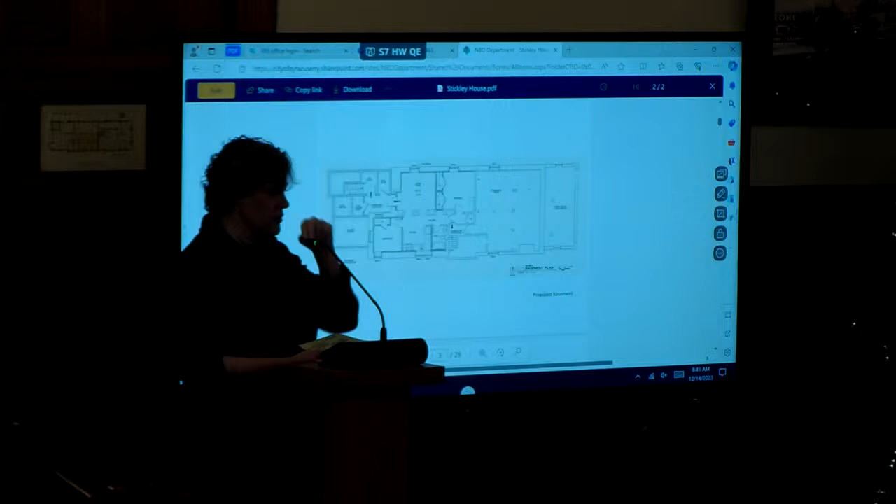All the kitchens were removed in phase one. All the bathroom fixtures, except for the historic bathroom fixtures, were also removed.

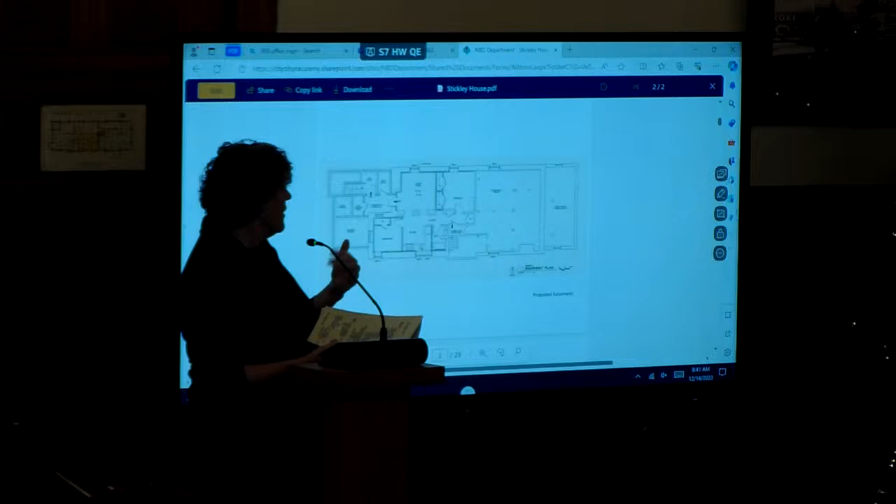Here is the proposed basement plan. There has been an apartment in the basement since the 1940s. We are proposing to maintain and completely rehabilitate that apartment. There is no historic material left from the 1940s apartment, as it postdates the period of significance.

The period of significance of the house is from Gus's renovation in 1902 until he sells it in 1911. The existence of an apartment dates to the 1940s. It was completely renovated in about 1985, when all new framing, bathroom, and kitchen were put in.

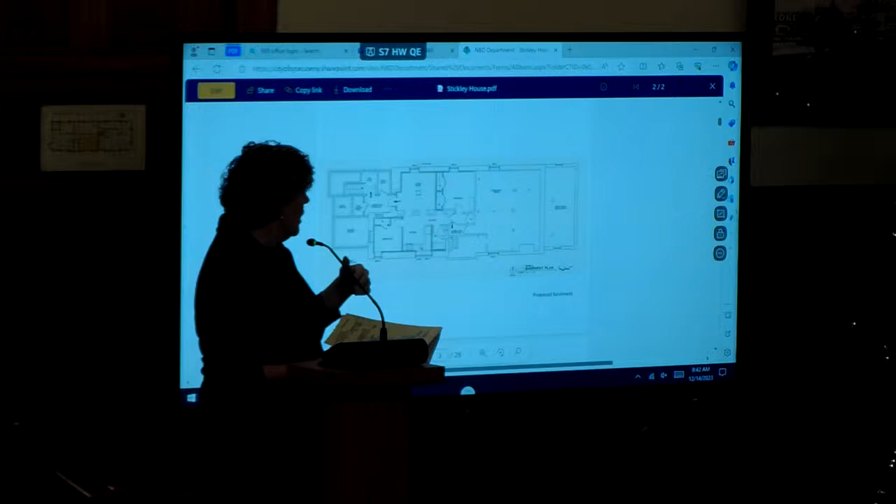Basically, the floor plan of the new apartment is the same. You can just see a few new walls here. I'll point out that this is the proposed addition, and I'll talk about that more on the first floor. This is basically the foundation of the addition. The remaining part of the basement is mechanical space in the front part of the house.

So it's essentially a small two-bedroom apartment for a caretaker. On the first floor of the house, from here up is the existing house with the new porch, which dates to 2017-2018.

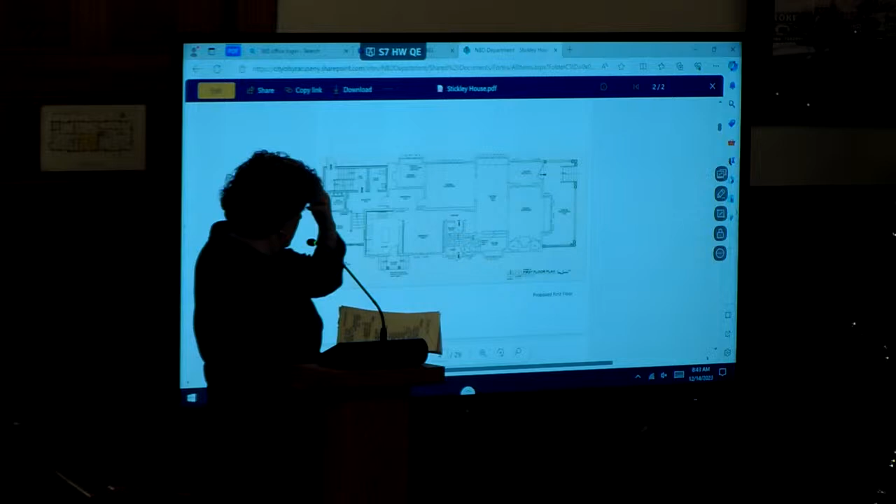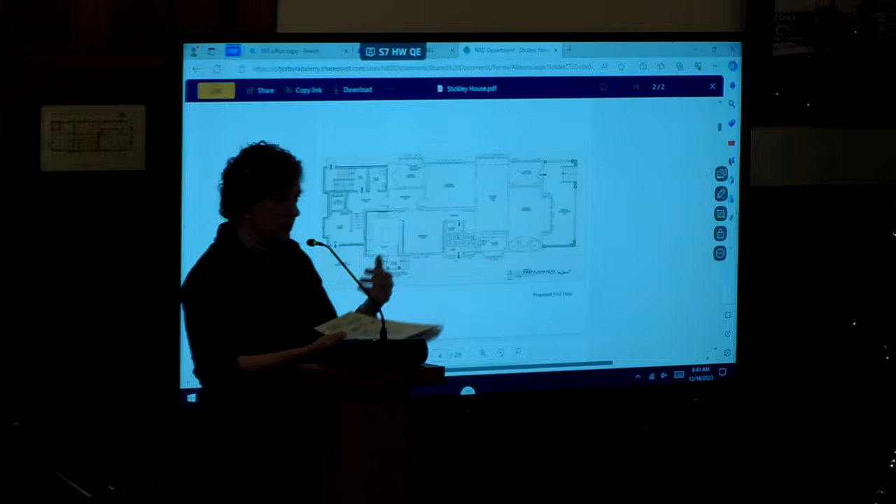The first floor will be restored and used as a community space and museum. The Onondaga Historical Association will be managing the space, and it will be available for those staying upstairs, as well as for rental space or community lectures—for example, if the Preservation Association or an organization like UNPA wants to have a meeting there.

In the back of the house is the proposed addition. This is a 460 square foot, very small addition which provides the accessibility that we need for the house. We're calling this the garden entry, with the entrance on the south side of the house at the southwestern corner, coming into an at-grade lobby, as described in the package.

There would be a small LULA, which is a small elevator, to get you from grade to the first floor and then up to the second and third floor, plus a set of stairs up to the same level as the first floor. There's also a secondary fire stair added here, and a small handicapped bathroom.

The only other new addition on this floor is this kitchen stoop, which replicates the historic kitchen stoop. That was actually approved by the LPB back in 2016.

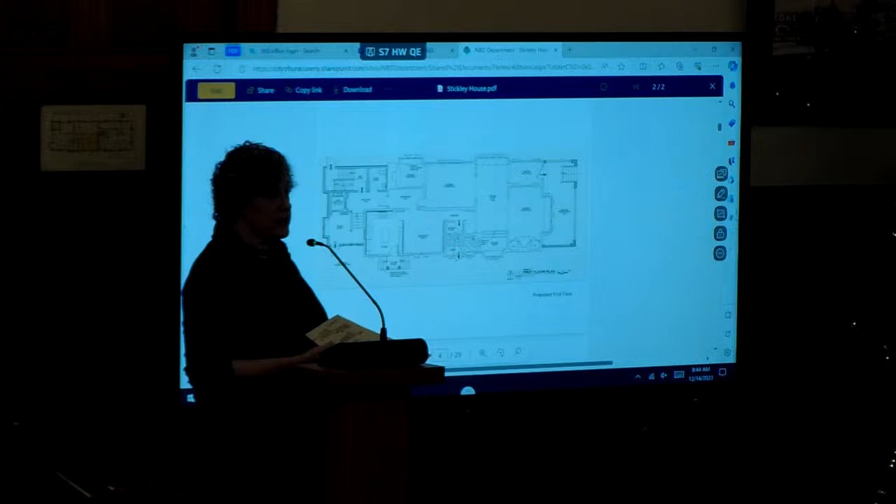On the second floor, we have added a few new partitions, keeping them to a very minimal amount, trying to preserve as much of the Gustav Stickley historic floor plan. The most significant rooms I'll describe are the primary bedroom here, which would have been Gustav Stickley's bedroom, and his adjacent office—we'll be reopening the door that used to connect those two rooms.

The bathroom here was added by the Wiles family, probably in the late 1920s or 1930s. And then this area here is the stair hall.

Some of you may have been here for the board meeting back in April when we came before the board for a removals project this year. We were able to open up the floor here; this had been covered over in the 1940s for a kitchen. We've opened that up, and that stair will be restored. You can actually go to the house now and walk up the stair, which is really fun.

That stair had been covered over since probably about 1947 or so. This is the historic bathroom that still retains its clawfoot tub and its original 1900 sink.

This is sitting room, bedroom, bathroom for suite number 3. And then sitting room, bedroom, and bathroom for suite 1.

At the back of the second floor, we have retained half of the sleeping porch. The sleeping porch was built in two different parts. It postdates the period of significance—we believe it's probably from the teens, and then maybe late 1920s. We're preserving half of it for the sitting room for this suite.

We've also stepped back the addition, so it's even smaller on the second floor. We just have the LULA, the stair, and then a small housekeeping room for linens and things like that.

This is the area where we are proposing to do window replacement. I have a couple of slides on that later, but this is the location here. And the other 4 windows, which are 1996 replacements, are in this bay here.

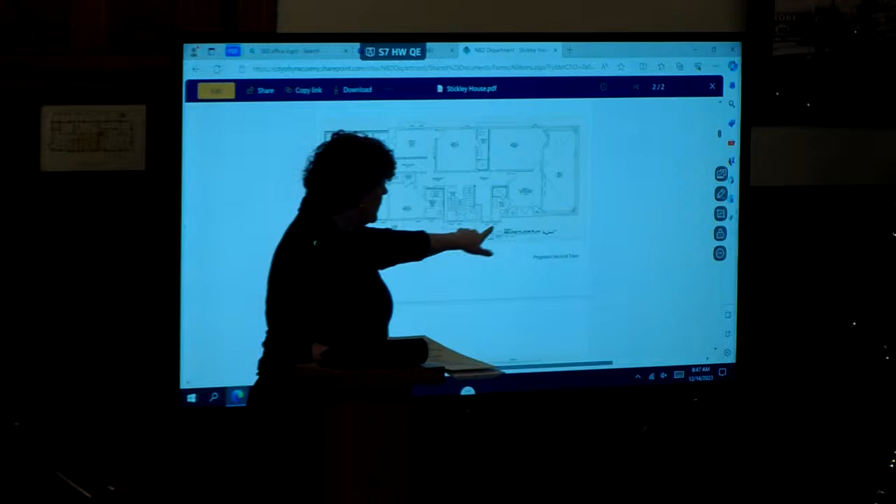This is the second floor of those 2 windows. This is the first floor of those 2 windows, just so that when I get to that point, you know where they are.

This is the 3rd floor. The 3rd floor did not have any significant craftsman period renovations, so it mostly dates to that 1900 period of the house. It has been significantly renovated over the years.

During our removals project this year, we uncovered locations of closets and things like that. It is certainly a secondary space in the significance of the house, but Gustav spent his later part of his life here—this was his bedroom. So we need to be respectful of the 3rd floor as well. That would have been his bedroom from 1920 to 1942 or so.

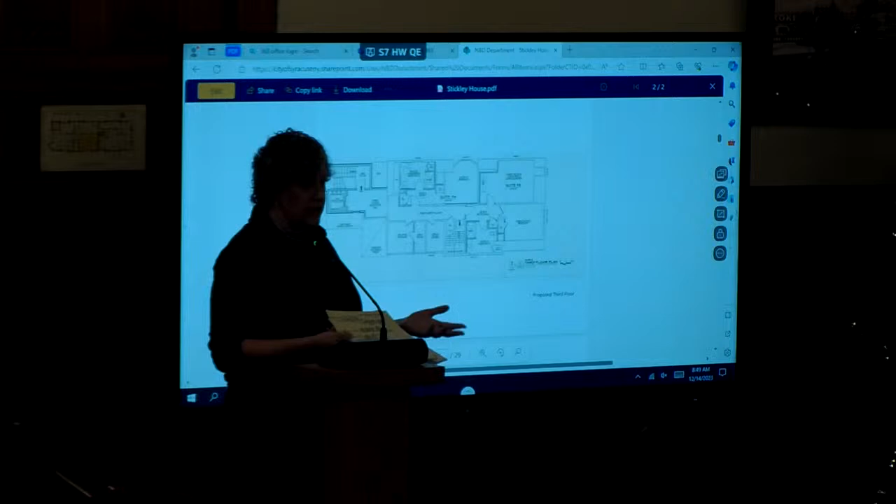There are 2 suites on the 3rd floor. The front suite is here, and bathroom here, public hallway. This is a low headroom storage area. This is a former bathroom with beadboard that we won't be restoring as a bathroom—we'll restore the room, and it will be a flex space for OHA, either a small office or storage. And then the secondary suite on this floor is here, suite 4.

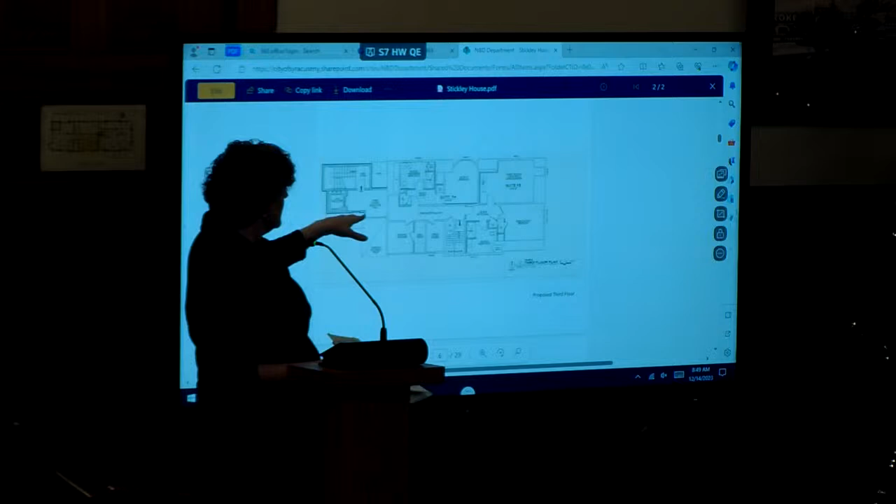And then the addition, about the same footprint as the second floor, except this roof area right here is a small indentation. It keeps us away from the historic chimney here, and it also provides a place to hide the kitchen vent, so it's away from any public view.

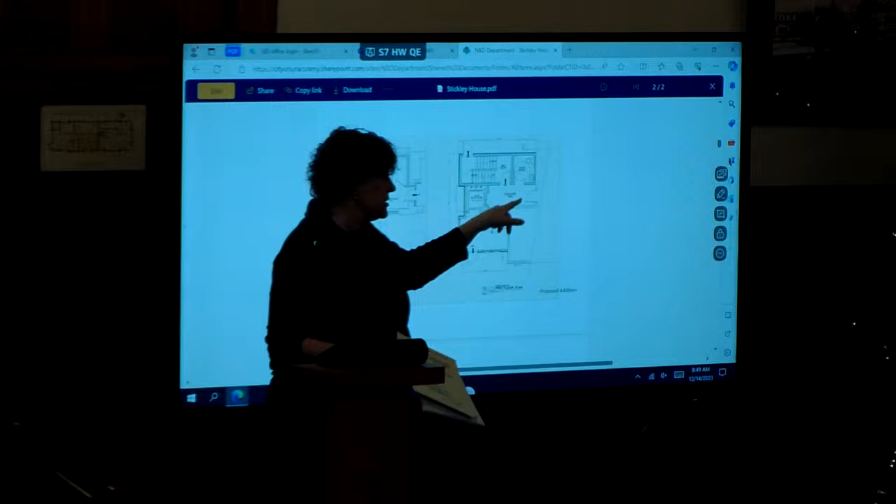This is a blow-up of the proposed addition. Again, garden entry, first floor, LULA, hallway. And this connection here, which I didn't talk about before, is through an existing window into what used to be a pantry. The pantry was pulled out a long time ago.

It was converted to a kitchen at least before 1985. The 1985 plastic laminate kitchen was pulled out about 6 years ago. And that's where we are proposing to connect to the historic house.

This is the foundation plan for the basement, where we'll have a secondary egress from the apartment on the basement plan, a small mechanical room, and then all of this is kind of crawl space. And then this is the stair up and out to grade at the back of the house.

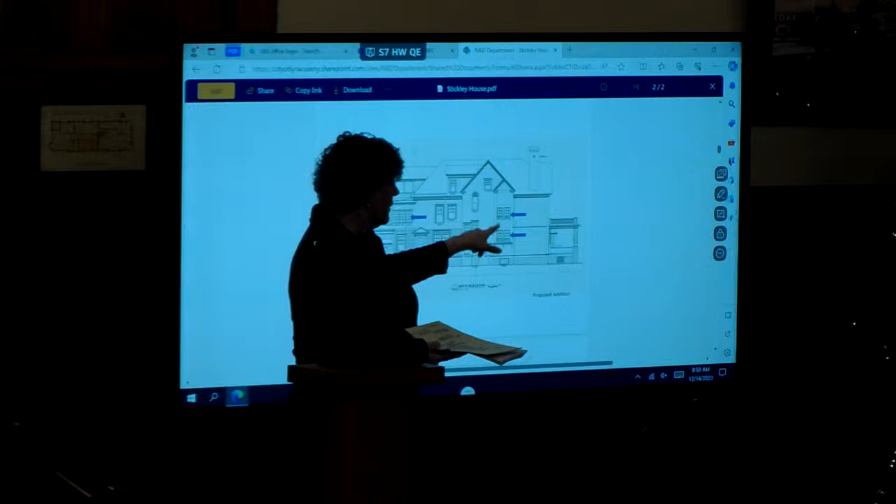This is the south elevation, standing in the driveway, looking at the house. These are the 4 windows that we were talking about replacing to match the leaded clear glass windows as we did in phase 1. Those were severely deteriorated in the mid-1990s and were replaced.

Right now they have a wood muntin, which is not historically appropriate. They would have been the leaded glass windows like we have in the living room and dining room.

This is the south elevation of the sleeping porch, and this is where we are proposing Marvin replacement, wood sash. If you think about most sleeping porches in Syracuse, they either have screens or lightweight windows, and these are very lightweight windows.

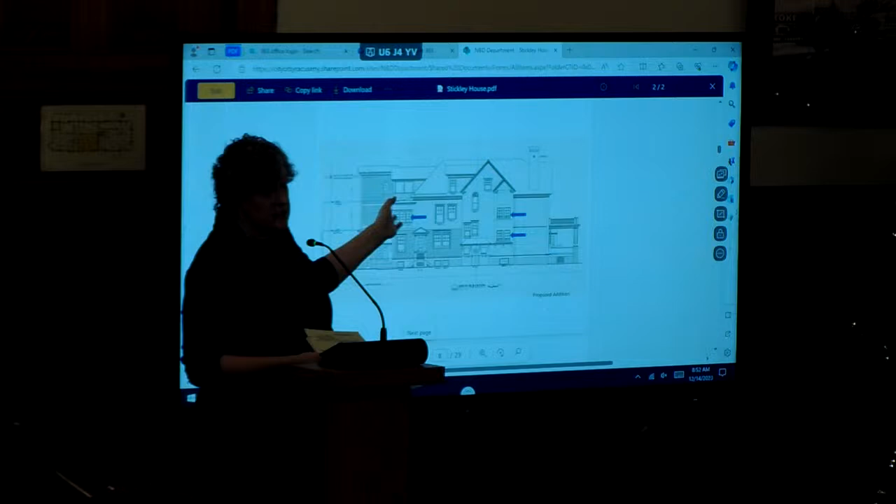They're not weather stripped. The preliminary determination from the State Historic Preservation Office, which we got probably 2 years ago, was a verbal yes, they will allow replacement of these secondary windows. They're not of the period of significance of the house, and we want this to be a finished space as part of this back bedroom.

And then this is the proposed south elevation. This is the lower part that is closest to the driveway, and then this is further stepped back in that blow-up of the addition that I showed. And then we're emulating the wood casement windows here from the screen porch.

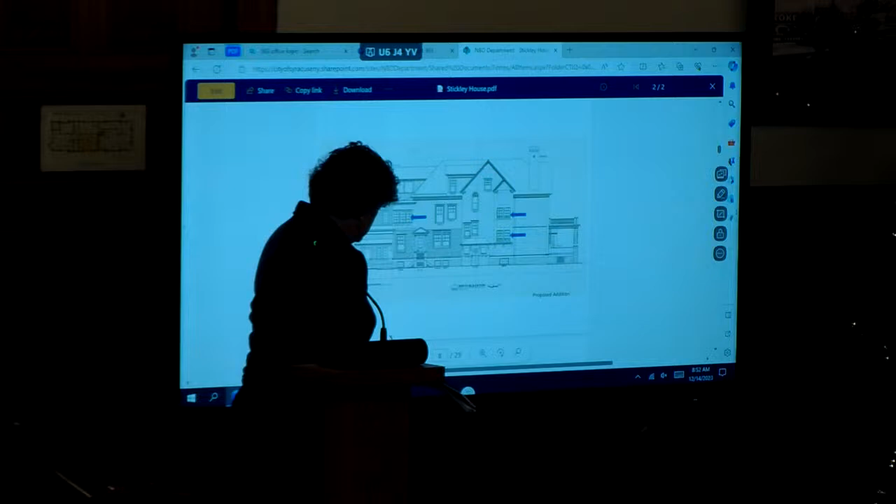The addition is stepped back from this corner and then stepped back from the other corner. You really will not see the addition from the street. You'd have to go up the hill and crane your neck to see the addition at all.

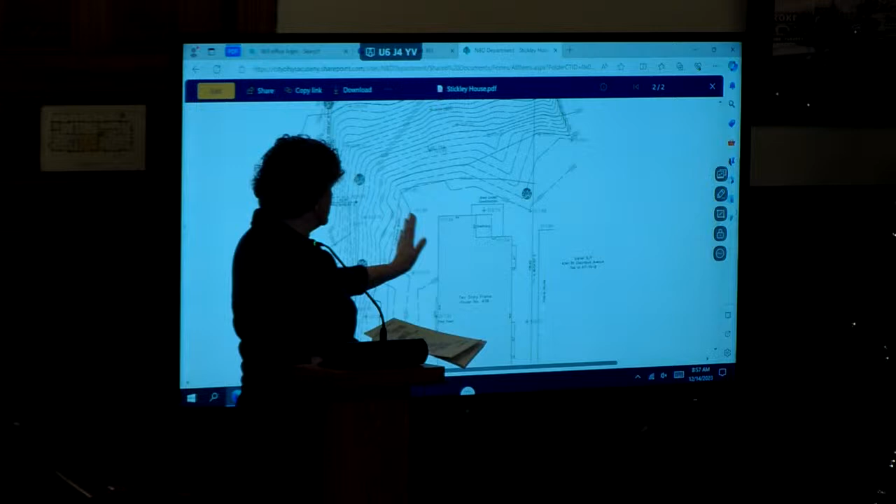So these are slides from EDR. This is the topo that we had done recently, and it is basically informational. What you will note is that directly to the west of the house is a large hill, and to the south of the house we have a smaller hill that goes up to the neighbor's driveway.

We've met with the neighbor to the south and discussed his driveway and how water should pitch from his driveway.

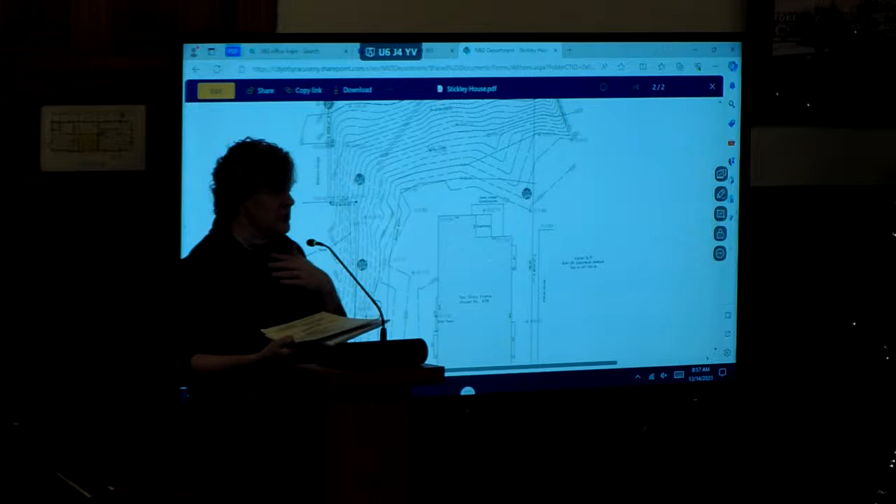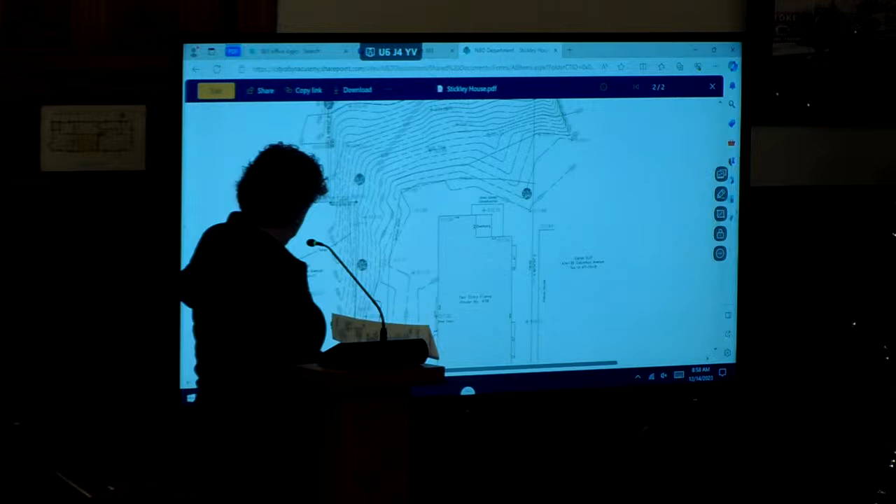So what we are presenting today is basically what I'm calling the concrete backer wall, which we will need to do as part of our phase 2, so that we can pour the concrete backer wall when we do the foundations to the addition. And then EDR will be coming back with the final site design development for your review at a separate time. So let's see if I can...

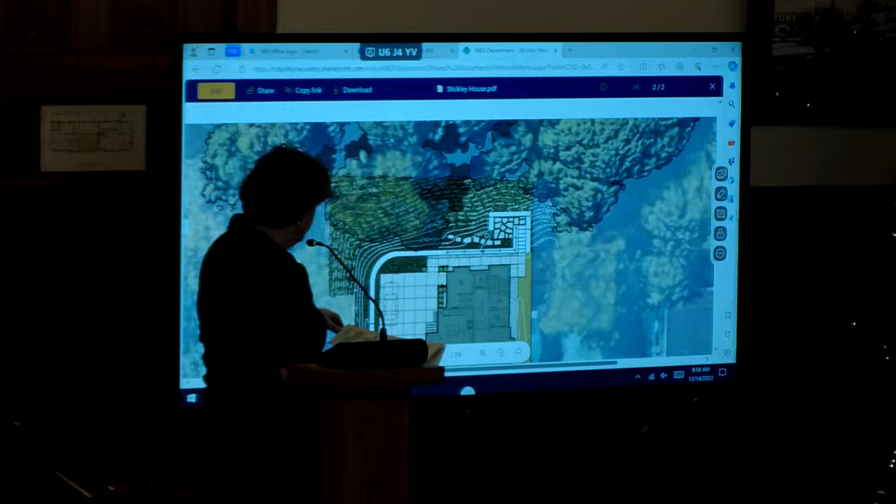This is just an overlay from an aerial photo. So this is the preliminary design that EDR has presented to the Gustav Stickley House Foundation. The parking layout was actually approved by the planning board a number of years ago - I don't have the exact date, but Dave, do you remember? It goes back like 3 or 4 years.

So the area in white here is the retaining wall. There is a detail in your packet, I think the last slide, of the proposed retaining wall, which would eventually be stone-faced with a stone capstone. But for this phase, it will be a concrete wall so that we can get that in, and then have mobility in the site, because right now it kind of gradually slopes up to the hill in the backyard.

So item 13 is the wall here. So here's the addition here, entryway here, exit from the stair goes out to the north. The next door neighbor house comes back, and they have a small parking lot, probably for about 4 cars in the back.

And they also have, I'll say, a steep hill. It's not quite as steep. Also of note is that there's about 4 trees that need to be removed. They've been undermined with runoff and things like that. And I think there's like 2 here.

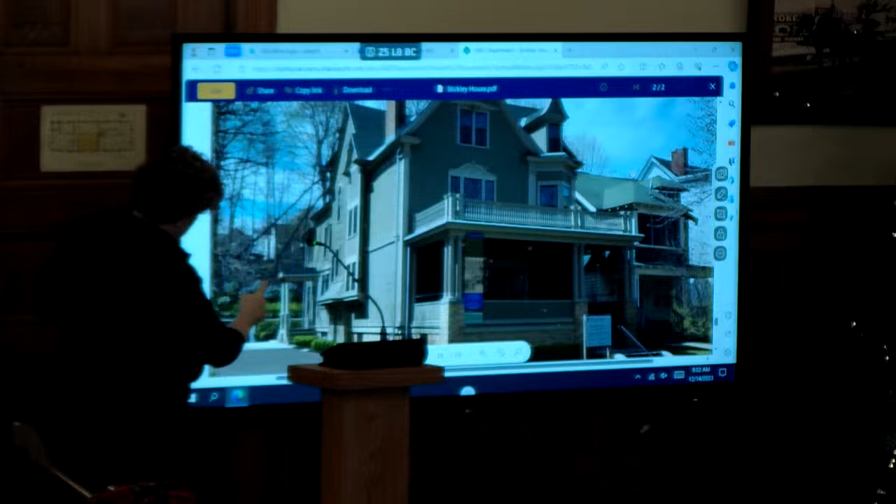And then this should be... it should be over there. Squeeze it up. Or just scoot it up. There you go. And you might be able to go to the side as well, push it over to the right. Put it over. Yeah, there you go. No, maybe that picture's not about it.

Blacktop, and again, these are presented as informational to the board, and you can see the top line here is the top of the stone wall, and they've illustrated stone here.

This is the kitchen stoop, and then blacktop, and then concrete pavers. Again, the front steps from the sidewalk to the porch, not the porch itself, are concrete. So it's all early 20th century. Concrete is appropriate for this period.

So EDR would present a planting plan and paving materials and all that other stuff. There you go.

So what would be built would be the drainage put in, the concrete backer wall, the footing, but not the stone and not the bluestone coping. And there's one small section that will require a guardrail, which is completely hidden from public view, by the back fire exit stair.

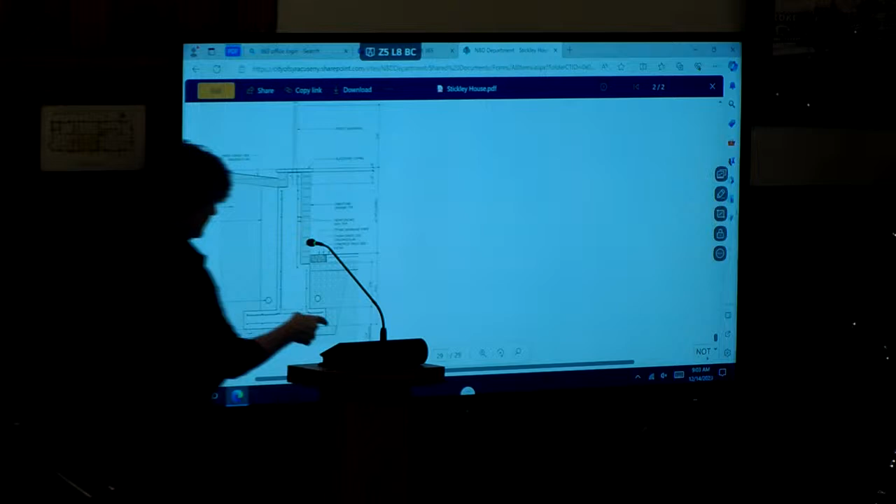And it's steps going up to the back garden. And EDR would propose the guardrail for that at a later period. That's it. That's all I got. Thank you.

Anyone who'd like to speak in favor?

What's that? I'll require this be moved. Can you state your name? I'm David... Michael. I live at 94 Xavier Circle. And as Beth indicated, I'm on the board of the Gustav Stickley House Foundation.

Beth is always very thorough. Just cover a couple of things. The foundation supporting the project is working to raise the funds. To date, we've received $2,250,000 of grants from state and federal sources. Particularly want to mention $250,000 from the county and $250,000 from the city, ARPA money. The foundation is in the process of raising additional money.

Our goal is to start the bidding process in early next year, hopefully January. However, the plans and bid documents do have to be approved by both the State SHPO office and the Federal National Park Service office, which could always be a delay. But we do hope to start the work in the spring.

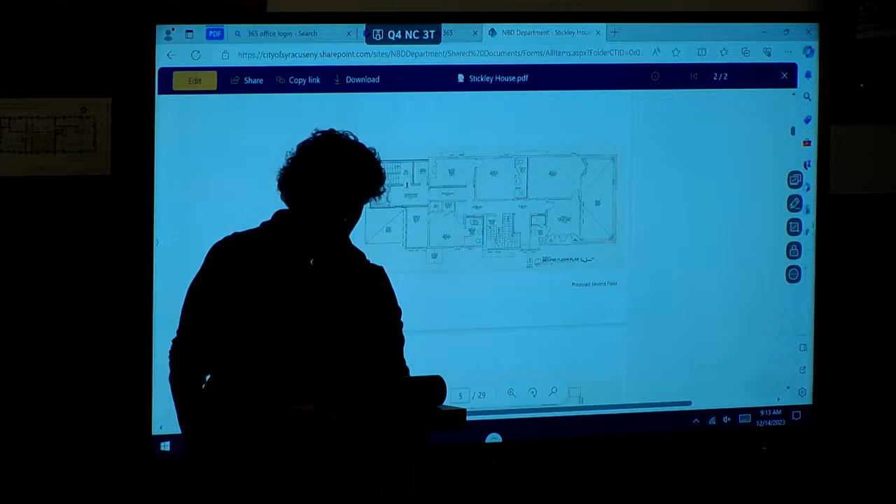You want to put the plan up? Yeah, that as well. So these three doors are kind of an iconic Gustav Stickley, they show up in the renderings from 1902 from the stair hall, which is a view from here looking this way. Right now, this is the entry door to this bedroom, entry door to this bedroom, and entry door into a small closet. What we've taken here for this small bathroom is we've taken three closets and combined them into one bathroom. So this door is fixed in place.

These two could be operable into the suites here, but what we tried to do was control noise from downstairs, because you'll have noise coming up this stair. We've closed these in place. We've done this in several properties, including the Babcock Shattuck House at the corner of Westcott and Genesee Street, where we closed off public hallway doors. We plated the doors at the hardware so the fire department doesn't think they can get accessible into that room.

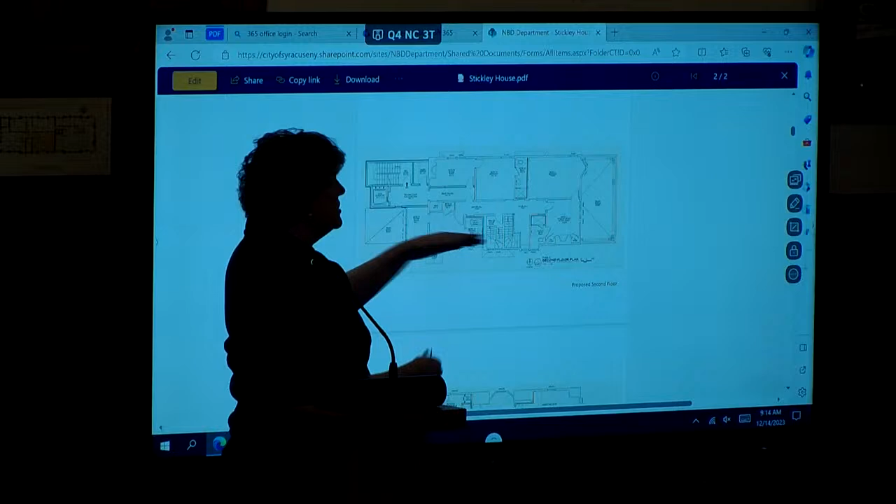What we did was create these secondary entries to keep noise down from this hallway, and that's why those three are shut in place. In this case, you'd come down the hall and enter here, then into this bedroom. You'd enter into the sitting room here. So that's why those three are closed off. They are historic doors, they have some issues and need restoration, but that's the plan for those three.

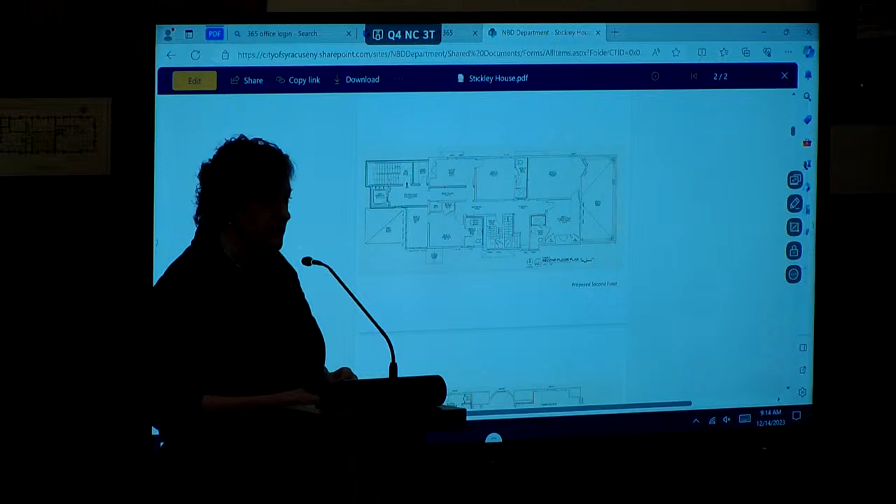That's what I had assumed, but thank you for clarifying. I had a question about the third floor, and I'm not sure if it even applies to this property at all, but is it required to have any additional means of egress?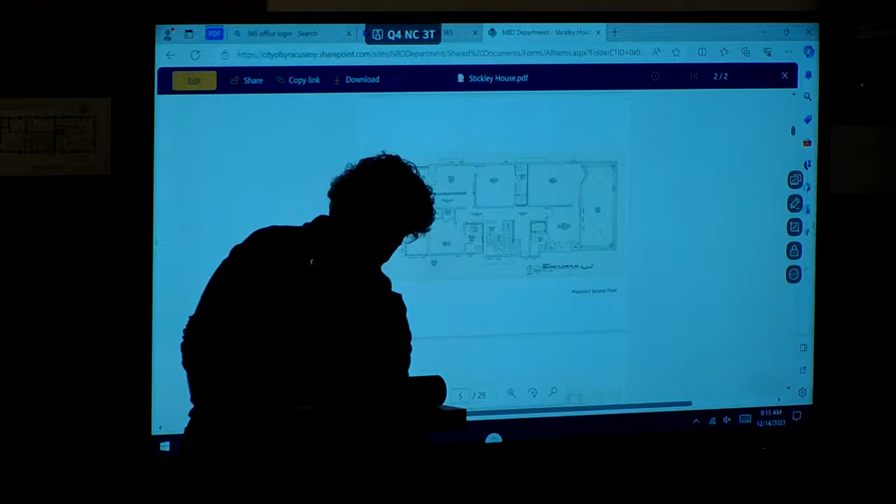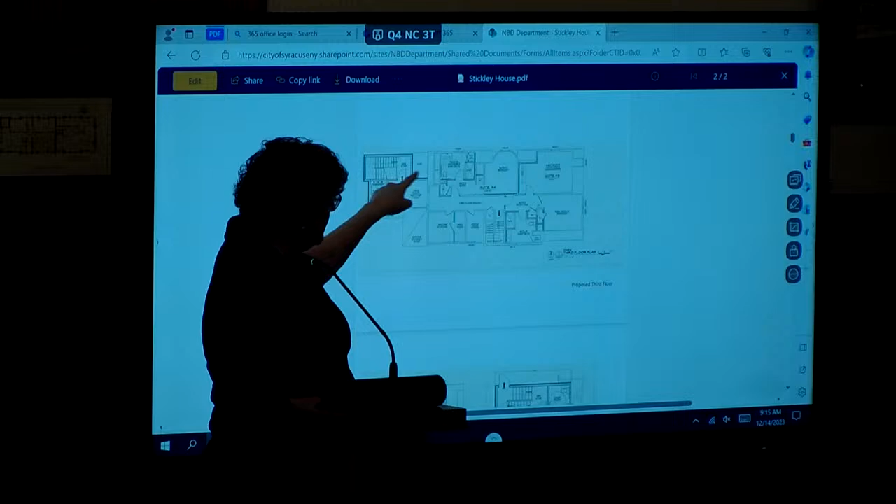So here's the stair at the second floor, and there's an up and a down here from the second floor. There is no formal fancy front stair going to the third floor, but we have this stair, which we just call the existing stair, but it would be the back stair, the service stair if you will, and then we have the secondary stair here. This is that little porch Jeff was talking about, an existing roof over the sleeping porch. So this is that little porch right there, and this is the little addition to get you to the third floor.

So yes, we have two stairs, and the house will be... I saw the two, I just was wondering if in the event there was a fire and they couldn't access those stairs at all, did you have to have something? That's why we have a window, and that's why we have this stair. And the building is sprinkled, correct?

What is it classified as, because it's no longer residential in a sense? So what are you classifying it as? Okay, so then R3? Okay. Well, that would also trigger the second exit, because if it was residential you could technically have one stair, using a window for exiting. I know, but it depends, if it was residential that's how they'd do it. Okay, any other comments?

Cynthia? No? Okay, so this is a certificate of appropriateness, so we need a motion. Would someone like to make a motion? I move that we approve. I second. All in favor? Aye. Any opposition? Motion passed, thank you very much. Good luck, keep up the great work, appreciate the presentation, very well done.

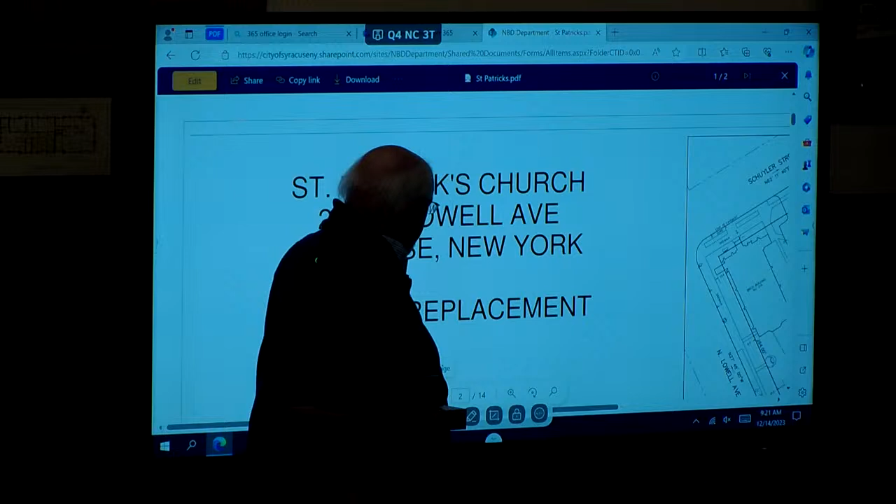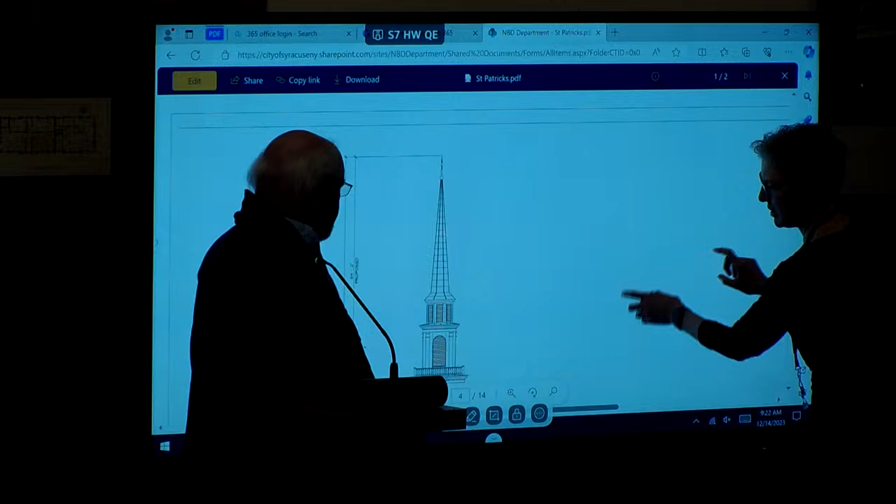Nope. Touch the screen. Right. Down. Zoom out. I have to admit, I didn't really put this together. This is from the application, so I'm going to bounce around a bit.

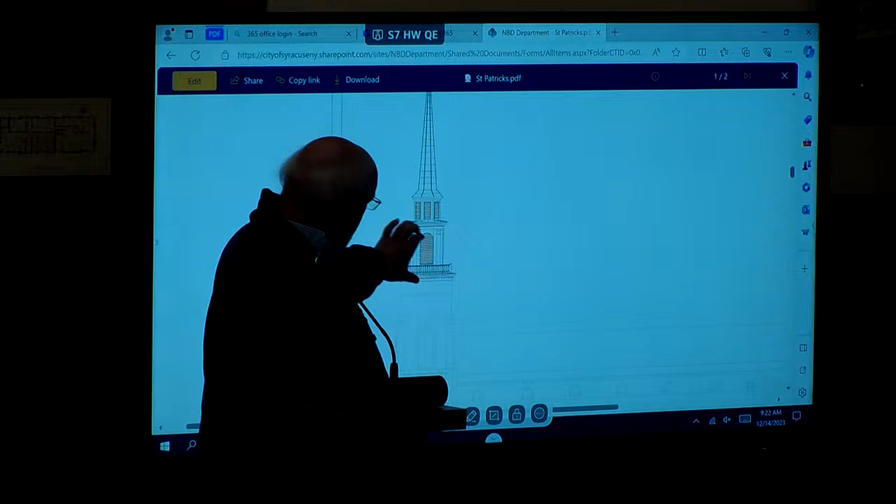So basically we're not touching anything on the brick tower going up to it. It goes up to approximately 70 feet existing brick. There's a flat roof with this little stumpy pyramid on it. We're taking that off and replacing it with this new design.

I got Del Paz to do us an artist rendering of what the new setup will look like. It is pretty tall. It's approximately 70 feet to there, and this is another 61, so it's 130 feet tall. As best we can tell, that's almost exactly what the original structure was.

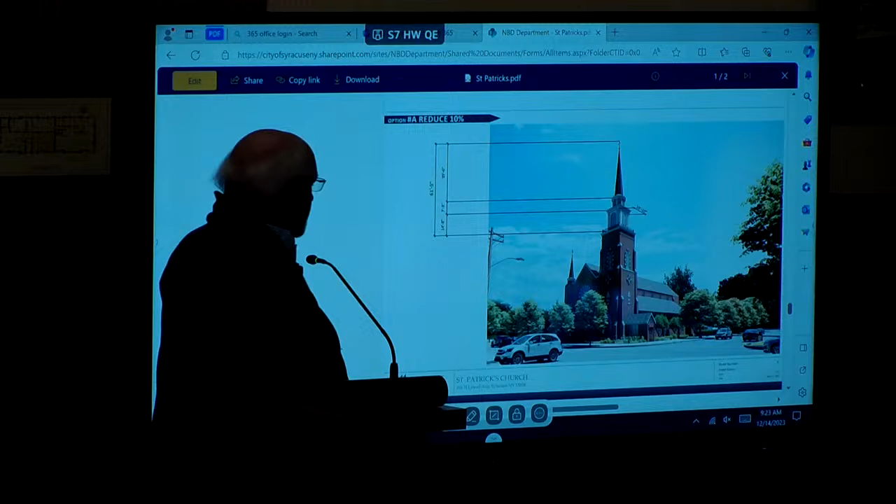I personally like the architectural element of this. I think it fits with the general style of church. The other thing we're going to do is this smaller steeple. We're basically duplicating this part of the spire again down here, just so there's some architectural cohesiveness between everything. Again, also with this, we're not touching any of the brickwork. We're just really taking the existing steeple off and putting a new one on.

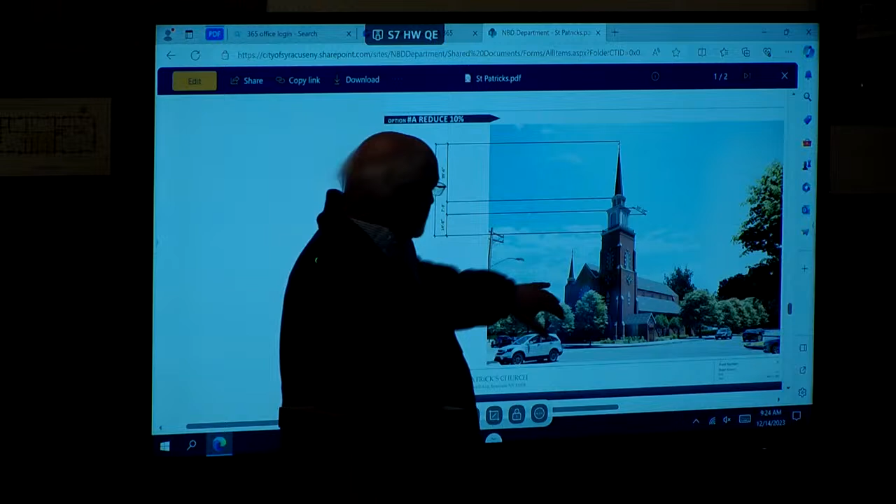Just a better detail. For this one, we do have a little structural steel work on the top. They deliver these things with a bunch of bolt holes, so you have to bolt them to something. I got a structural engineer involved to make sure we can support the wind load. It fell over 100 years ago. We don't want to do it again. It's not super involved structural steel, but it ties it in such a way that we can meet all the building codes for wind loads.

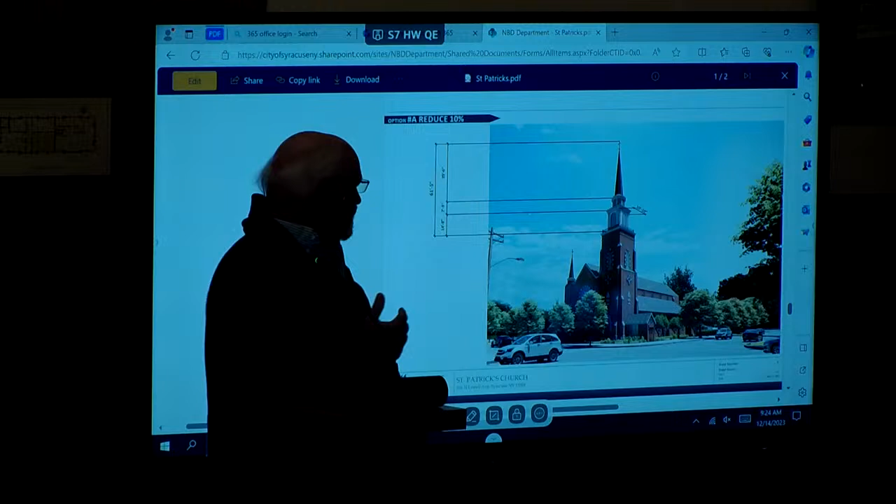In New York, it's now 122 miles per hour for wind load. 150 years ago, I don't think they even thought of it, which is why it fell over. And going up.

I guess what I'd rather do, if you guys are okay with it, that's the proposal. I do better with questions and answers. Well, if you're finished with your presentation, we can have a discussion, because this is a variance, and we're only making recommendations. Am I finished with my presentation, which I didn't know I had to give till 2 days ago. You did very well. And I got back from Florida at midnight last night. Great job. Thank you for coming.

I understand why you want to replace the steeple. I guess I should say that I wrote the National Register nomination for this church, and it is a Gothic church. And the steeple that you're proposing, this 3-stage steeple, is not characteristic of a Gothic building. I'm wondering, couldn't you do something simpler, more like what was originally there? Still use your prefab, but do something that was closer to what was initially on the building.

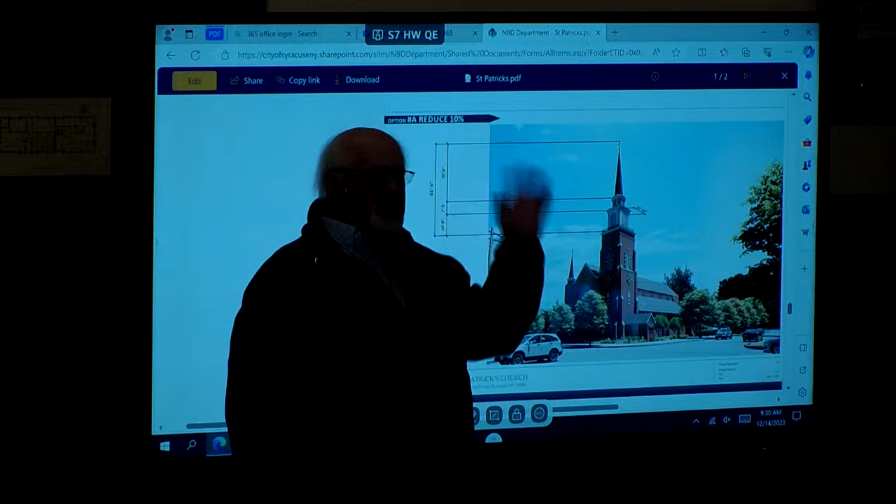So, at the risk of sounding weird, I'll be completely honest with you—that's already ordered. The problem was when we started this project, nobody told me we were on the historic list or anything, and Campbellsville had a 9-month lead time, so there was a rush to order it and figure out the details later. So, I've got a problem.

I'm personally emphatic about having a new steeple placed on this church. I attended St. Patrick's as a young child, I was an altar boy here, I have a lot of great memories of this space. I was blown away to see we're adding a tower to this structure—very excited, slightly deflated when I saw the design—and I was hoping we could have an open conversation and make some modifications to be more architecturally appropriate. I'm fine with that; I'm not in control of aesthetics by any manner, I'm just the guy trying to get it built. Sure, but if it's ordered, that changes things. Yes, it does—I'm sorry it went that way.

So, other comments? No, other than if we keep that configuration, another possibility would be to modify the profile of the openings so they at least reference the Neo-Gothic language or something. I agree with everything else stated, but I'll second that it feels very discordant with the character of the existing building.

So the variance is required because of the height. It's an area variance, so this needs to go before the BZA, and the role of the Landmark Preservation Board in this is to comment. What the board will do is provide its comments back to zoning, and those will become part of the record when it's considered by the BZA.

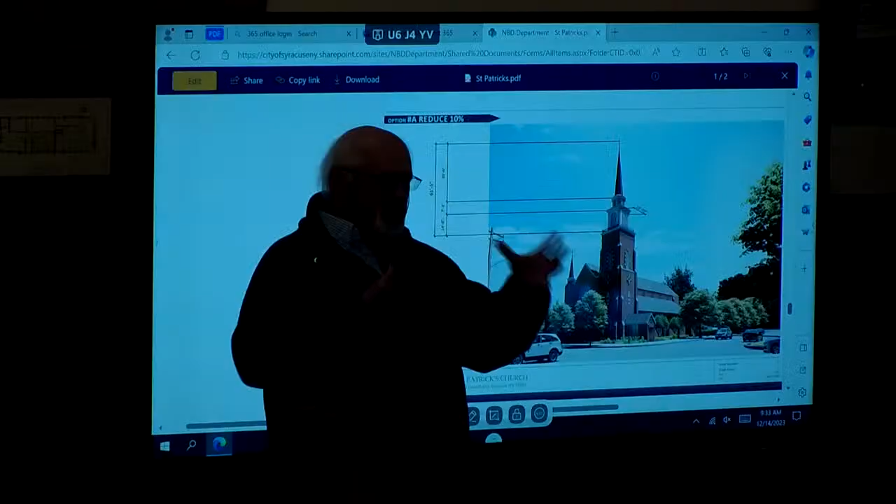I think we probably could still make a couple small changes, like if we wanted to make this more of a Gothic instead of a rounded arch, it's going to cost us some money, but I think we can probably do that. If we start changing the structure, that's probably going to get an awful lot of heartburn from them and from everybody else.

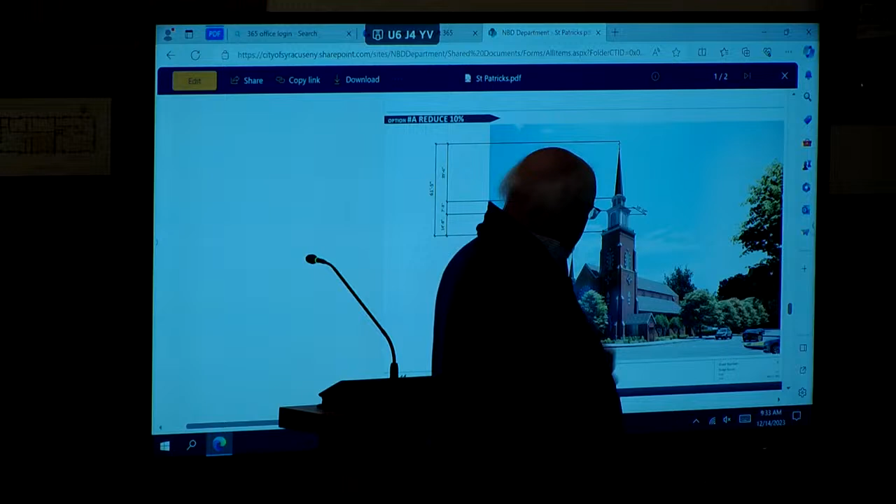So I agree with you. Many Gothic designs down here that aren't carried out, but we probably could get this changed to a Gothic arch. Balustrade if you really don't like it. We are amenable to doing what we can do.

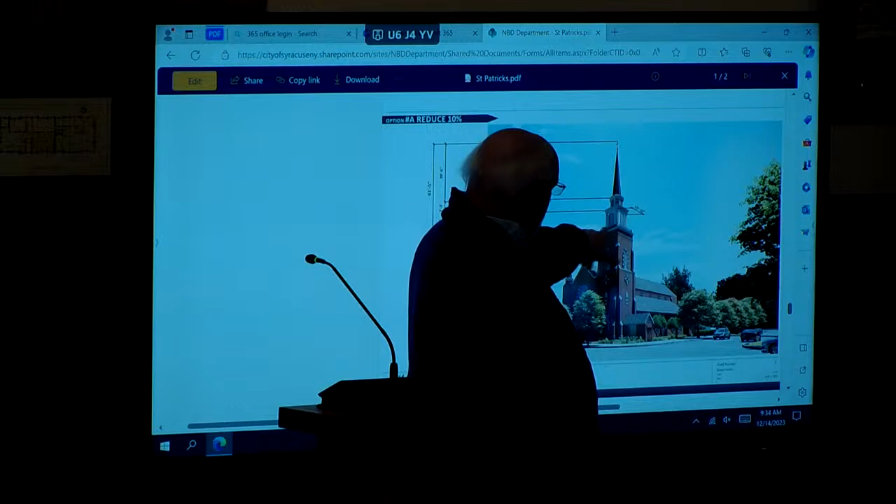What is the balustrade attached to? A cap? Yes, this whole thing comes as two pieces, we assembled it, the whole thing drops. This is a rather nice design in the balustrade, and this coping goes on top of and down, slightly down the side of the existing brick. So it drops in place, one over piece.

Okay, there's no exposed roof. There's no roof exposed up top. That's not good. And right now, it's just a brick wall up. Also, next project - which you're now telling me what to do next year - is repoint the whole brick, the whole place. It's not great shape either.

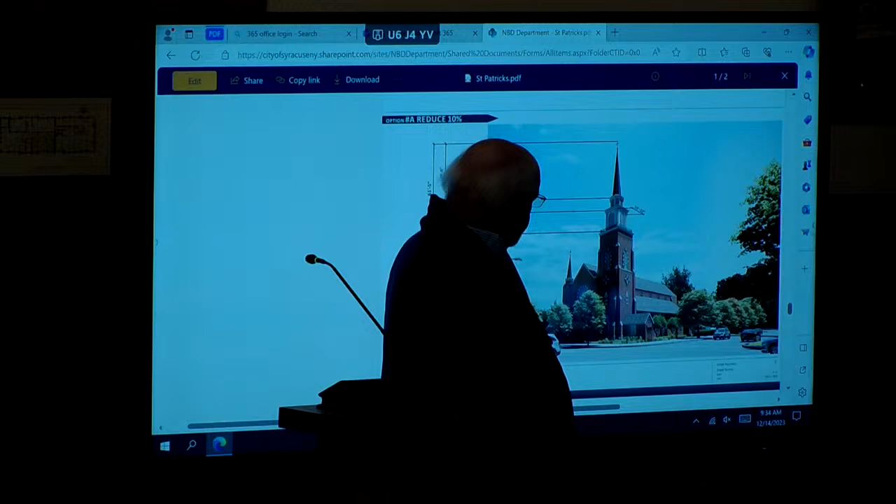So this is comment only. Would you like to make a comment? This is my comment: I support the installation of a steeple for the purposes of getting - what's the word? Spire? Well, get the variance, thank you. Okay, I support putting up a steeple, getting a variance. I do not support the existing design, the proposed design.

Any other comments? Okay. I'll summarize what the comments were, and we'll provide those - do we all support the variance for a steeple? Yes. I would agree that, I mean, I don't take a vote, but my comment would be that I do support the church's effort to put a spire on top of the church. And I would agree with Jeff in terms of the stylistic character of the new spire not being in keeping with the historic nature of the building.